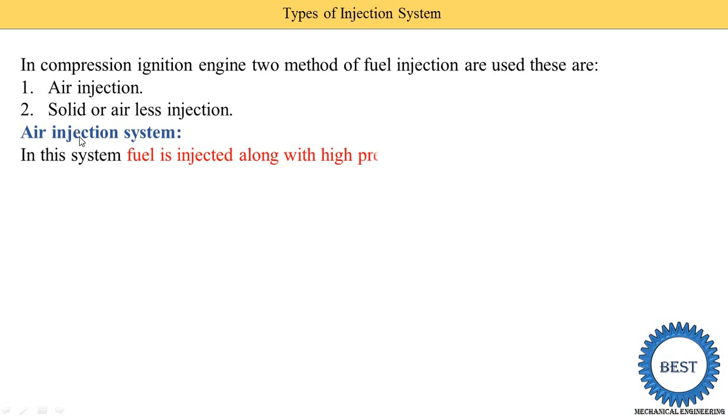First we understand the air injection system. In this system, fuel is injected. Which is our fuel? Our fuel is diesel. Diesel is injected along with high pressure air into the combustion chamber. So in the combustion chamber, we are not only spraying the diesel, we are injecting the fuel, that is the diesel, as well as the high pressure air.

The pressure of the air is about 70 bar. And what is the pressure of the diesel? It depends on the pressure of the air after compression that is present inside the cylinder. So a multi-stage air compressor is required to supply the blast of air at high pressure.

To achieve this high air pressure of 70 bar, which is very high, we require a multi-stage air compressor. So the diesel engine cost is increased because we need an extra compressor and its maintenance, and it has lots of components. This is the disadvantage of the air injection system, because we require a multi-stage air compressor.

A fuel pump draws the fuel from the fuel tank through a filter and discharges a definite quantity into the injectors. So two things come to the injector. At the inlet of the injector, one is the diesel coming from the fuel pump, and the second is air coming from the air compressor. The high pressure air from the compressor is also led to the injector valve, which forces the fuel through the nozzle when it is opened mechanically.

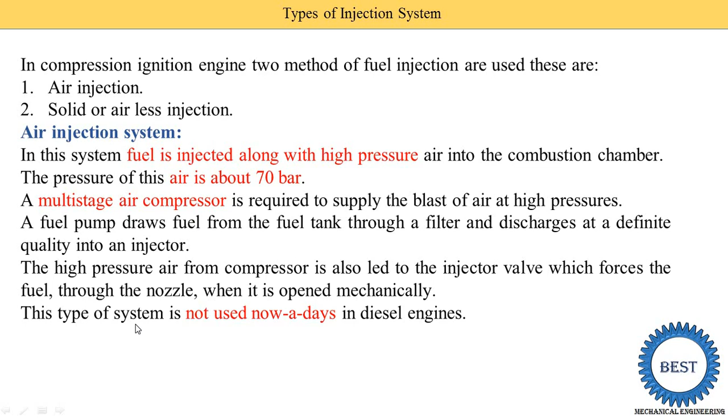This type of system is not used nowadays in diesel engines because it has certain disadvantages. So next we understand the advantages and disadvantages of these systems, which are listed below.

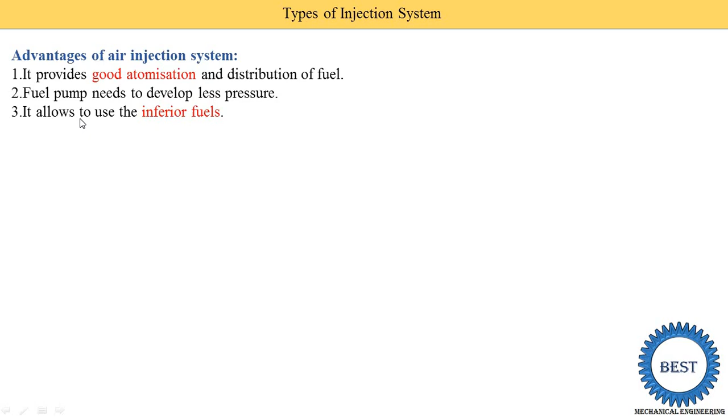It allows the use of inferior fuels. Inferior means low quality fuel that can also be used in an air injection system.

Next is the disadvantages of air injection system. It requires high pressure multi-stage compression, and a large number of parts are required when multi-stage compression is there.

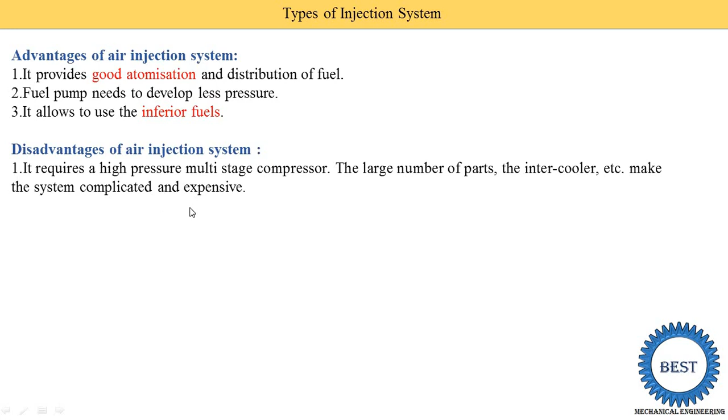One component required is an intercooler to cool the air, which makes the system complicated and expensive. A multi-stage compressor is used, which makes the system complicated and increases the cost of the system. That is called an expensive system.

The power output and mechanical efficiency of the engine is reduced greatly, as a considerable amount of power is required to run the compressor. Since we use multi-stage compressors, we need to supply some power to the compressor from the engine, so the efficiency of the engine is reduced.

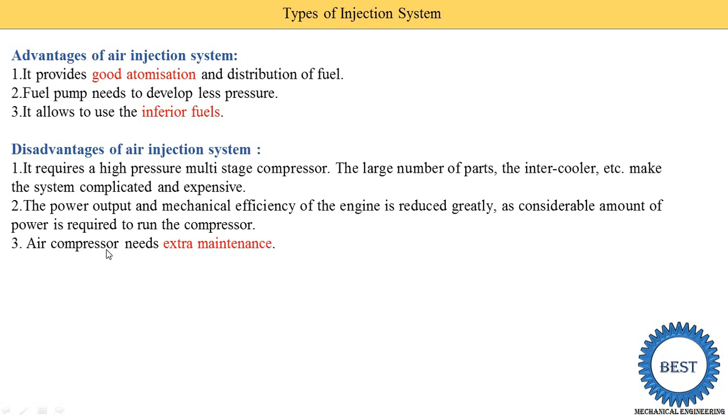The air compressor needs extra maintenance, so the maintenance cost is increased.

Now the second type is solid injection, or airless injection system. From the name we can understand it doesn't use air. In the last case we studied the air injection system, but in this case air is not used.

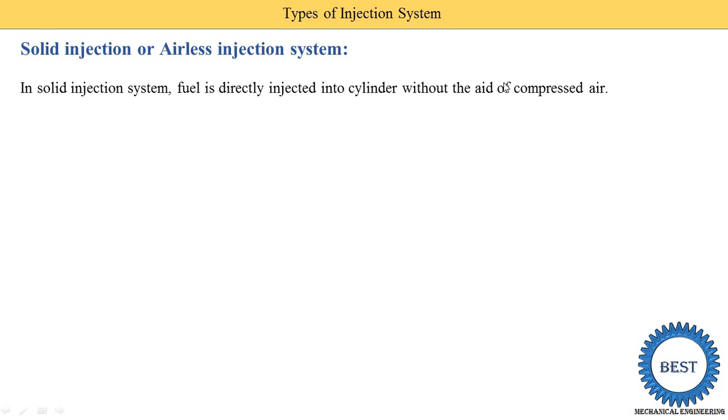In a solid injection system, fuel is directly injected into the cylinder without the aid of compressed air. This means only diesel is sprayed inside the cylinder, not air. That is why this system is called a solid or airless mechanical system.

In this system, fuel is supplied at very high pressure, up to 200 bar. So minimum 70 to 100 bar pressure is required, and up to 200 bar is used depending upon the pressure of the compressed air at the end of the compression stroke.

If it's a high pressure engine, we require spraying the diesel at very high pressures. So the fuel is supplied at very high pressure, about 200 bar, from the fuel pump to the fuel injector, from where it is injected into the combustion chamber with the help of an injector. The main parts of the system are the fuel pump and fuel injectors.

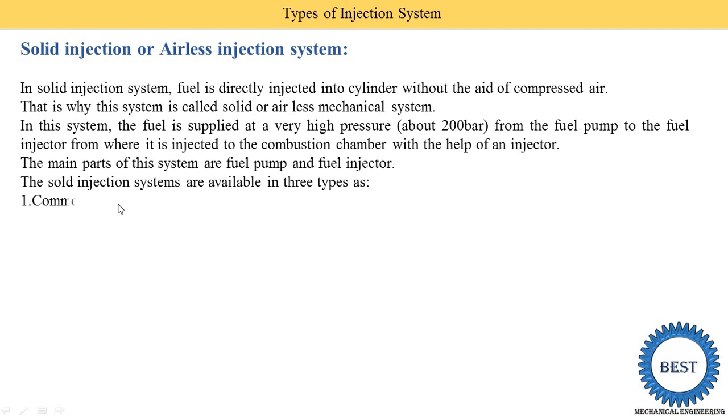Solid injection systems are available in three types. First is the common rail injection system. Second is the individual pump and injector system. And the third one is the distributor injection system.